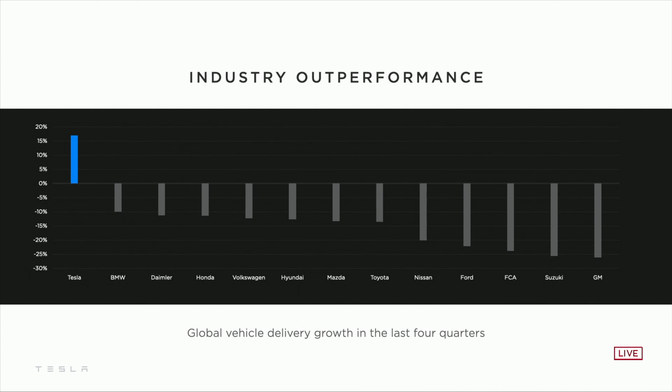Elon also mentioned how critical safety is to their design. They make the safest cars ever tested. And interestingly, the Y was not in some of their documentation. It might just be that the data's not out yet. I'll be curious to find out. But they mentioned the X and the 3, which we know are safest in segment. And I'm sure the Y is right there as well.

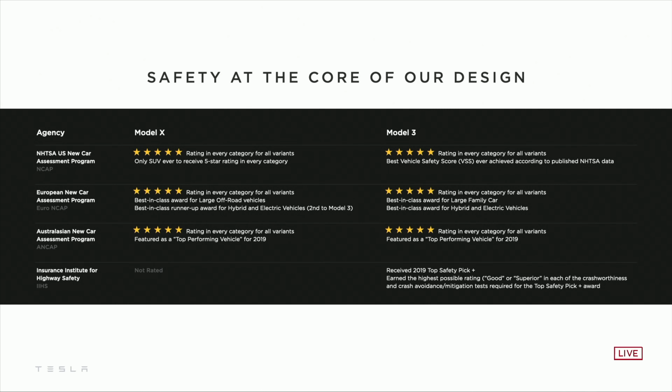One thing I thought was very insightful, and I'll do an entire episode about this. As a software engineer, I think I have a pretty good idea on what they're struggling with, but their entire FSD software package has gone through kind of a page one rewrite. So I think their platform was hitting limitations, and rather than try to patch it with fixes and small changes, I think they wanted to refactor it, re-architect it, and build it again from the ground up.

There's also news about Giga Texas and how they're going to be building Model Ys, which look the same, but they're going to be built differently. All right, so now let's jump right into the heart of the matter, Battery Day.

So first, I loved what Elon mentioned about how they gauge success. He mentions that the idea is, I want to measure how much quicker we have a sustainable transportation model. And that's how he gauges his success. And honestly, already today, I think the number is like 20 years. We'd be 20 years ahead of where we would be without Tesla. And that number is only growing.

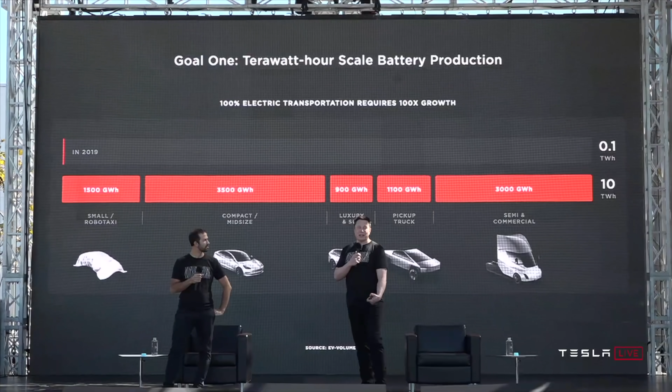Over 1 million EVs delivered and over 26 billion miles driven, all really cool metrics. The next thing is he jumps right into talking about the current battery output. Currently, Tesla is at around 0.1 terawatt hours of battery output a year. And he says we need to be at about 10 terawatt hours per year. So going from where we are now in the gigawatt hours per year capacity to 10 terawatt hours is a really big jump.

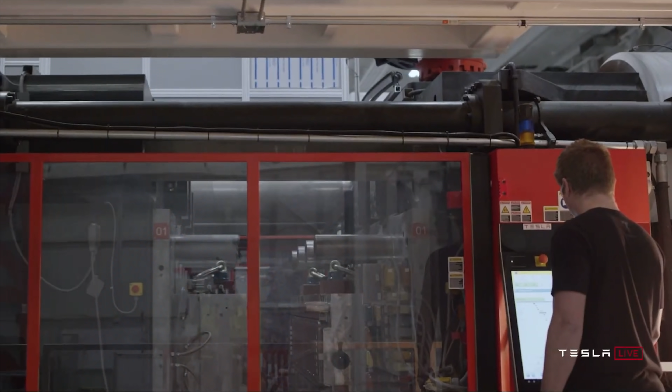And it gets to the heart of one thing I want to make sure that we're all clear on. And that is all the batteries that Tesla is currently buying, whether from Panasonic or LG Chem or CATL, they will continue to do that. Tesla wants to get their hands on every cell possible. If they have more cells, they can make more cars and more Powerwalls and make more money. So they need every cell they can possibly get.

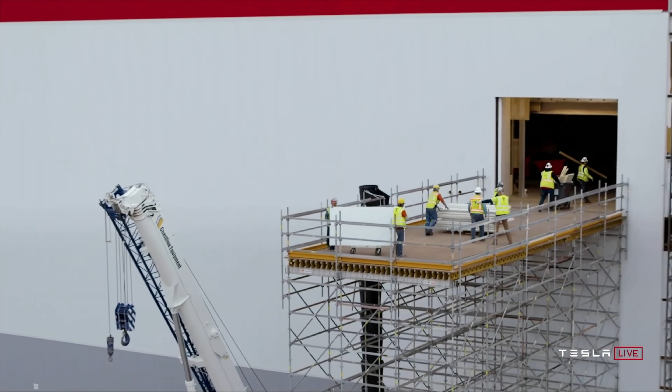And as they project out into 2022, Elon mentioned in a tweet that they're projecting that there will be shortfalls where they're not going to have enough batteries for the kind of scale that they want to build up to. And that is why Tesla building their own batteries in-house is a big deal. To further drive this point home, he mentions that we would need 135 gigafactories like the ones we have in Nevada to make that many batteries.

That just isn't going to happen, in terms of cost, labor, materials, and all the other things that would be needed. That's just not doable. So their goal really is to be more efficient, make more batteries in their factories, make them more energy dense, and all around improve output.

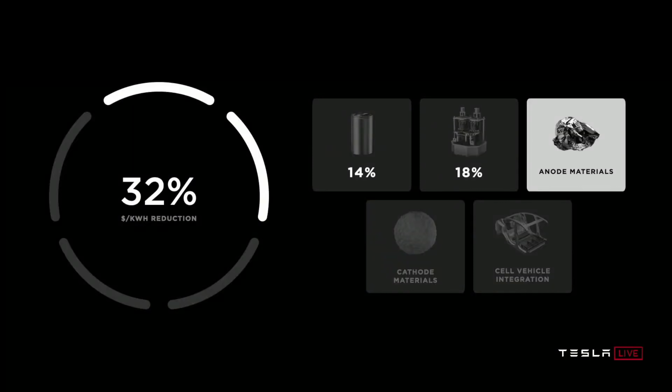So to make a better battery, Tesla has broken it down into improvements in 5 key areas. The first is the battery cell design, the individual cell design. The second is the cell factory, how they're going to build individual cells. The third is the anode materials. Fourth, cathode materials. And fifth, the cell vehicle integration, how it all comes together into the package of a car.

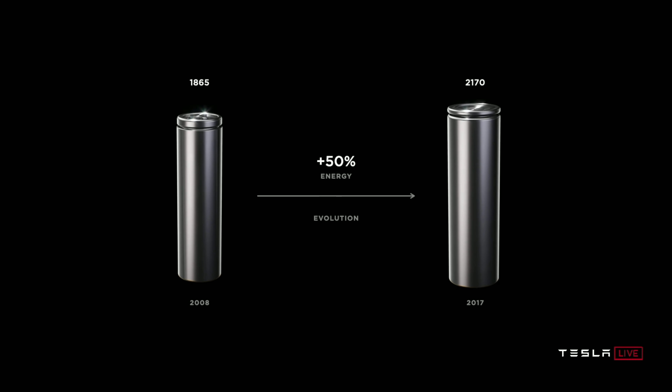Tesla's first batteries in their Model S were 18650, 18 millimeters around and 65 millimeters tall. That moves over to 2170 when they went to the Model 3 and Y. Now, their next cell is going to be even bigger, and it is a 4680. So that means 46 millimeters across and 80 millimeters tall. This is by far a larger battery than they've ever built before.

There's a lot of good things that happen when the batteries get bigger. You can pull more, so the power density, how much energy you can draw from it at a time, goes up. Tesla mentions that the real challenge to bigger batteries is that the heat goes up, and you can't have the batteries getting hotter. So how do they solve that? By going with a tabless battery design.

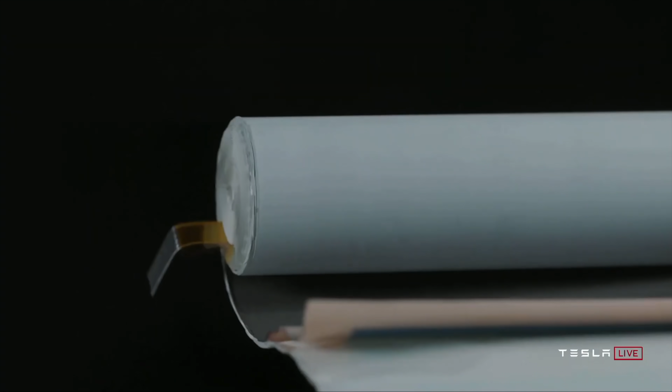Until now, the batteries that they've been putting into their cars have a tab on it. What that means is if you were to unwind the battery roll, the furthest point the electrons would have to travel could potentially be the length of the roll. And now these battery rolls, when you unwind them, could be like 3 meters long, or 9 feet.

So let's say the tab is in the middle. Well, then at the furthest point, you'd have electrons traveling half the length of the roll. And if the tab is on the end, you'd have electrons that have to travel the entire length of the roll. This causes higher resistance and impedance, and it also makes the batteries hotter as they operate.

The solution to this is to go with a tabless architecture, and they have a spiral tab design. So each roll has a little bit of a tab that overlaps and touches itself. As a result, you don't have to have a tab at some point in the battery length. All you'd have to travel is the 80 millimeters that the battery is tall. This is really important, and this is what's going to allow them to use this bigger battery and mitigate the one problem that the bigger battery comes with.

From the cell design, step one of their improvement process, they're going to have 16% better range. I think for volume or weight considered equal. So for example, for 1 kilogram of the old cells versus new, you're going to have 16% more range. Second, you're going to have a 6x increase in power. This power is really important for high power applications like the Tesla Semi.

My car is measured in watt hours per mile. So 250 watt hours per mile means 4 miles per kilowatt hour. The Tesla Semi will be the other way around, measured in kilowatt hours per mile. It'll probably be multiple kilowatt hours per mile. So with this new cell design, they're going to have 6 times the power density from each individual cell, which will be great.

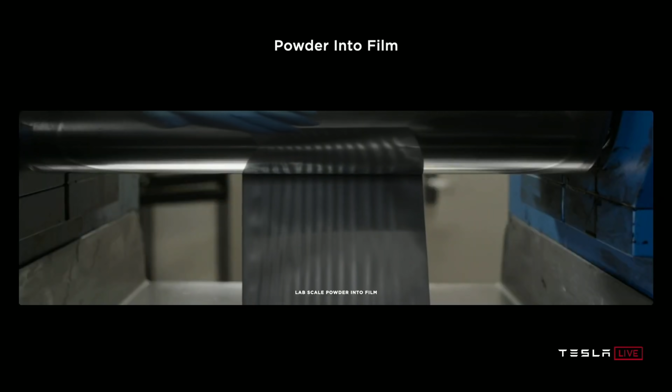All right, so now step 2 is the battery factory category. There's a couple of things here, and they want to talk about the electrode. This is where the Maxwell technology acquisition really comes into play. I knew this would be a big improvement in terms of floor space, methodology, and procedure, and that it would help them make more batteries, but I cannot believe just how much of a reduction this is going to result in.

Current batteries are created when a wet slurry mixture is added to an electrode, and it is then forced into a baking process, then treated and fixed and finally ready to go. This new procedure would be a dry coating, shown as a kind of press. You put the dry coating material on top, roll it through a press, and as a result, now you have the dry electrodes completely ready and attached to the current collectors without any baking or anything else.

The end result is a 10x reduction in the energy required—all that baking, all the ovens, all that sort of thing—and a 10x reduction in floor space footprint. That means in a factory, you only need 1/10 the space you used to need for all these machines, and as a result, you could have more assembly lines for battery production.

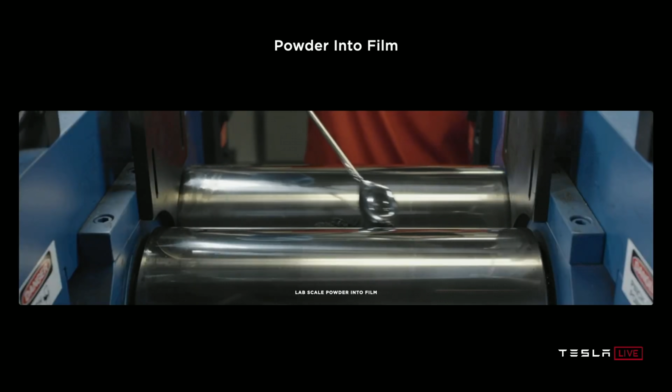One thing Elon wanted to make really clear is that this procedure is really difficult. It wasn't like they acquired Maxwell Technologies and it was mission accomplished. They mentioned they're on their 4th revision of the machine to actually do this dry coating application, and he believes it might be revision 5 or even 6 by the time this reaches full production. So this is really hard—if it was easy, he says everybody would do it. But the end result is shocking, and it'll completely revolutionize how they assemble and put together batteries.

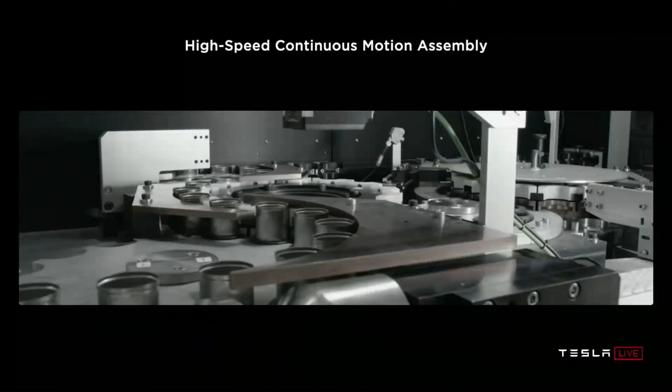They also acquired Hibar Systems, which will be the battery manufacturing machinery they're going to employ. They've already started to improve upon their process and come up with a continuous assembly line to maximize output. In the entire presentation, my biggest takeaway is that the one thing Elon wants to absolutely dominate on is being the best manufacturing company in the world.

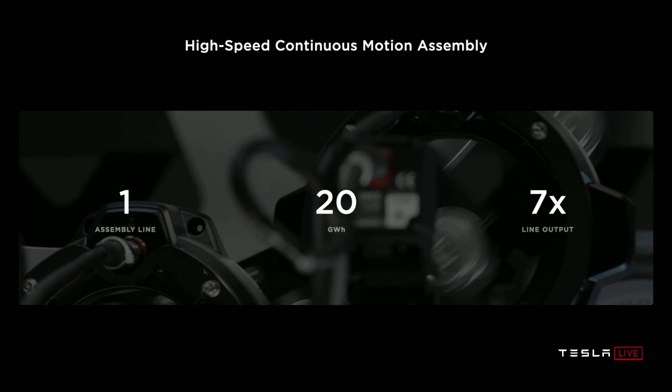He mentions that in a couple of years, everybody will have a long-range EV—that isn't the hard part. He says he wants to be the best manufacturing company in the world. I think what that really means is that long-term, even if other people start to license batteries from other companies, Teslas will always have the advantage because they are deeply invested in the vertical integration of building their own battery. As their manufacturing prowess and expertise increases, they'll widen the gap because they'll have battery costs substantially lower than other people. Until a day when they have so many batteries that they're selling it to other customers, they'll have the biggest advantage in the market.

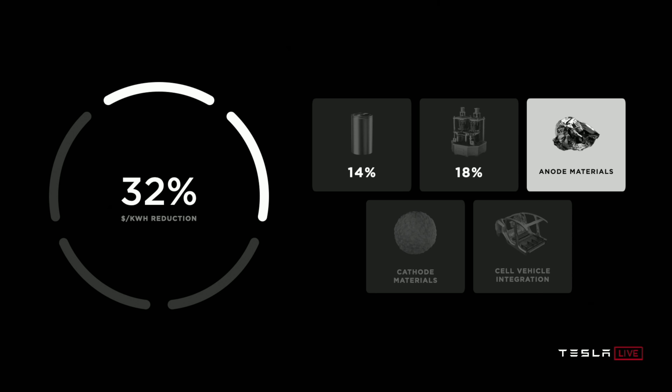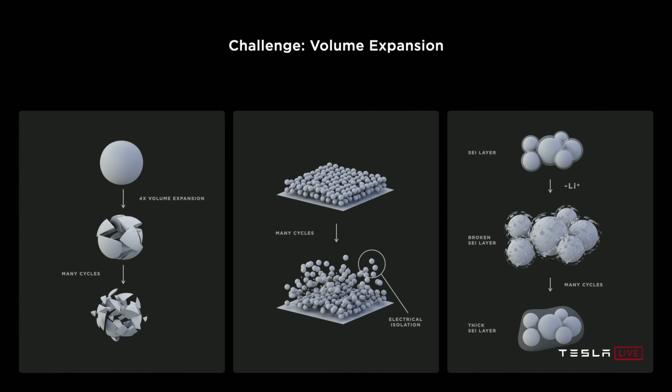The next two categories are anode and cathode material—the main components of a battery. The big takeaway here is that rather than just buying this raw material from some other company, they have plans to build a factory in North America where they will actually be in the business of producing anode and cathode material, not just buying it from somebody else.

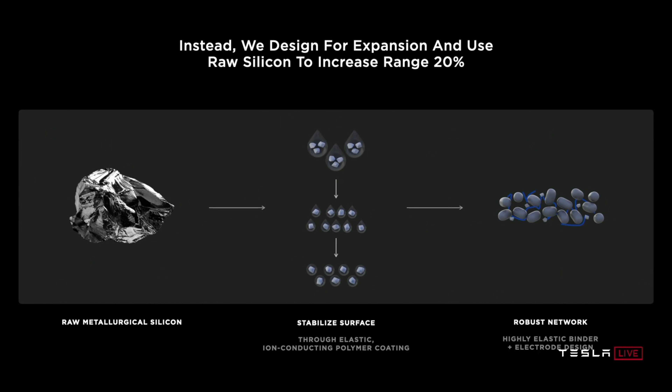For the anode, clearly the move is to have more silicon, but how to do that is key, because solutions like silicon glass or silicon structured in graphite and silicon nanotubes—which is something people thought they might go with—are all really expensive, and the volume they could yield would be too low for the scale they're trying to build batteries at. So they're going to come up with a custom Tesla silicon, which is going to be very cost effective at around $1.20 or so per kilowatt hour. As a result, they're claiming about a 20% better range than with their current chemistry for the anode, all while keeping costs really reasonable.

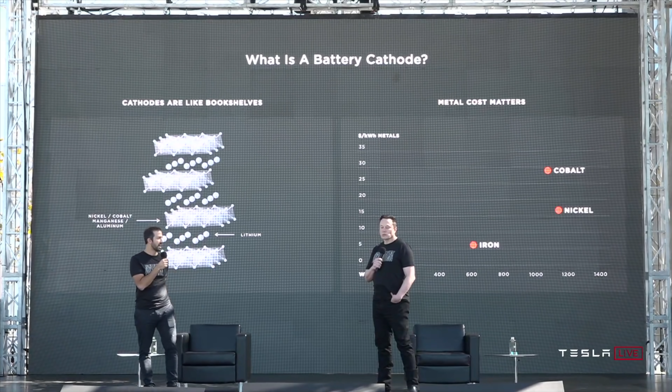Part two, of course, is the cathode. The first key is they wanted to be cobalt free. The reason why is cobalt is the least ethically sourced of their battery materials—there are concerns with child labor and other concerns that Tesla does not want to be associated with. Plus, it's really expensive. So their new battery is going to be cobalt free.

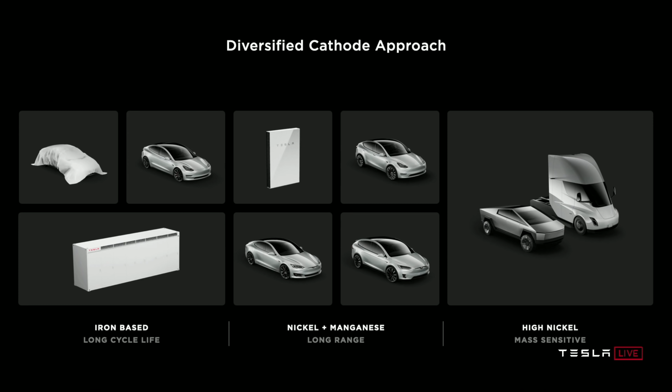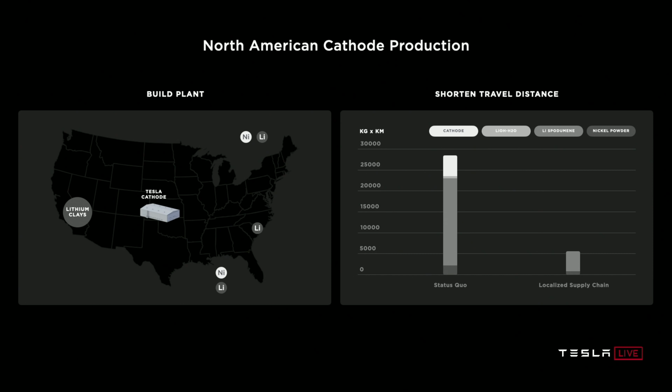The big surprise here for me was the fact that they mentioned they're building a lithium and cathode factory or plant here in North America. That means they'll take raw materials and build them out into the cathode and lithium materials that go into batteries. This is really important because it means they are now in the business of recycling—because when you handle the entire material supply chain from that level, when old packs come in to be recycled, that's actually a cost-saving measure.

Because when you have to go mine it, it costs this much. And when you can just grab it from your own battery packs you used to make and break those down into the lithium and the nickel content to recycle, your costs are actually getting better. So recycling isn't even being done for the environment, which it will be. It's being done because it means it'll have the cheapest supply chain possible.

And he mentioned that when we reach full scale, meaning when everyone's driving electric, we have batteries everywhere, the supply chain will barely even involve mining. It'll all just be recycling. And that's amazing because it drives a nail in the idea that batteries are bad for the environment because sure, we do have to mine them. Once we have them, they can be reformulated and recycled and reused, which is not true about petroleum, for example.

Another comment that I've gotten in the past is about lithium mines. There was an idiot on Twitter that I retweeted who said, this is a lithium mine, and showed a huge hole in the ground. And it's like, no, that's a copper mine, because you don't mine lithium like that. Lithium is actually found in saltwater brine pools around the world.

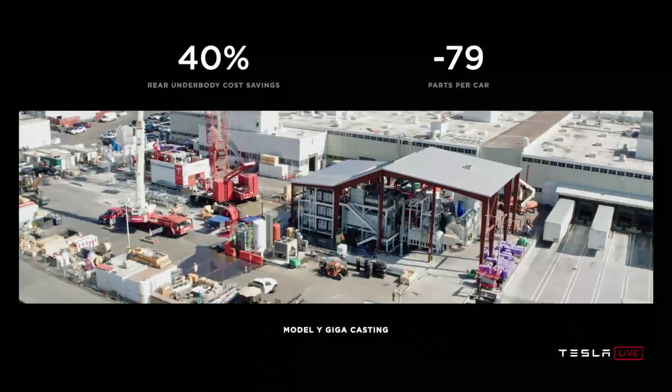All that metal for the pack is metal and weight that isn't giving you any range. So Tesla wants to get rid of that and to reduce all the bits that don't add range and streamline the entire process. How they will do that is with the Gigapress, which is the largest casting machine ever on Earth. And what it will do is it'll build the entire front and back of these vehicles as one huge cast.

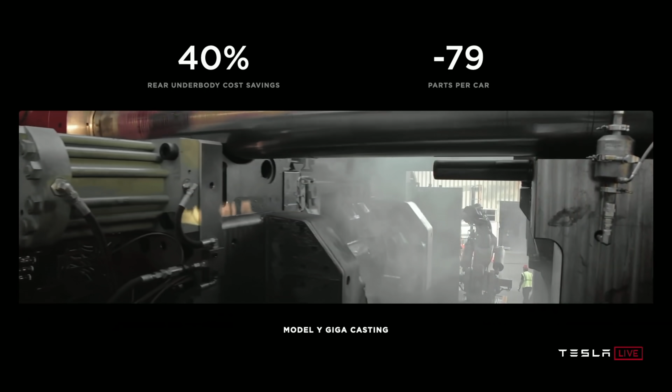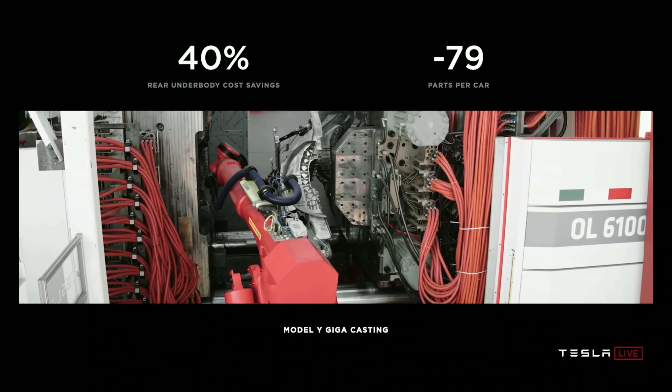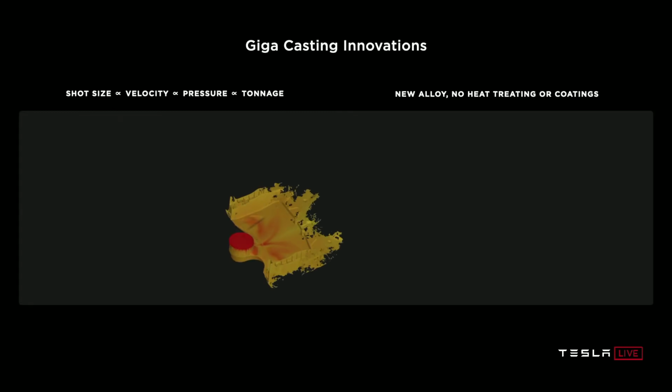Currently, there's a lot of different parts that are stamped into the right shape, and they're either riveted or welded, and there's just a lot of parts and a lot of complication. This machine would actually build the entire back end, for example, of these cars in one piece. And they were able to do that because they actually came up with their own alloy of aluminum. The key here is that it doesn't need to be heat treated to be strong. And that is key if they're going to cast the entire part in one go.

So now with the one piece casting, the batteries would have a place to be fit in. And he mentioned that the structure that will be used to glue and laminate the batteries to the top and the bottom will all act as structure. So now the batteries and the casing are all part of the structure of the car, as opposed to building a structure with an open area for modules to sit in.

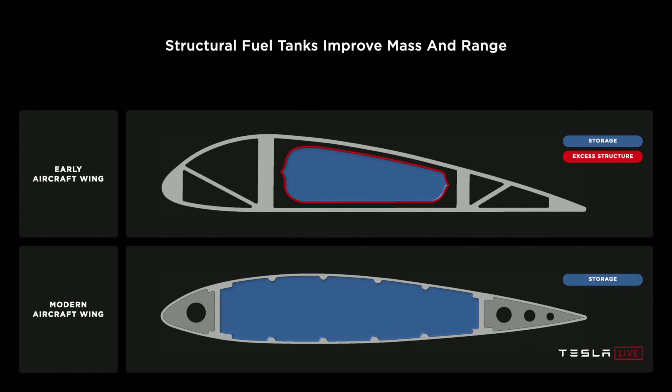And his analogy was to airplanes. Early aircraft had wings that had space for a fuel tank. Later airplanes actually decided, what if we build a wing-shaped fuel tank? And that's kind of what they do. The entire wing is a fuel tank, and it's kind of built into the right shape. That's the approach they're taking with their battery integration into the vehicle itself.

So if you factor in 1, 2, 3, 4, 5 all together, the end result is a 57% savings. But that's not all. They're claiming 54% more range. I'm not sure if that is for the same amount of mass or volume, but either way, it's pretty impressive. And a 56% reduction in the price per kilowatt hour at the battery level.

Also, the investment per gigawatt hour is reduced by 70%. So that means if they want to go and scale up to 10 terawatt hours per year, the price that would need to be spent to reach there has been reduced by 70%. So this is what they're planning to do. And they actually have a battery factory that they're building batteries out of in Fremont. So they have their in-house development. They're going to scale that up.

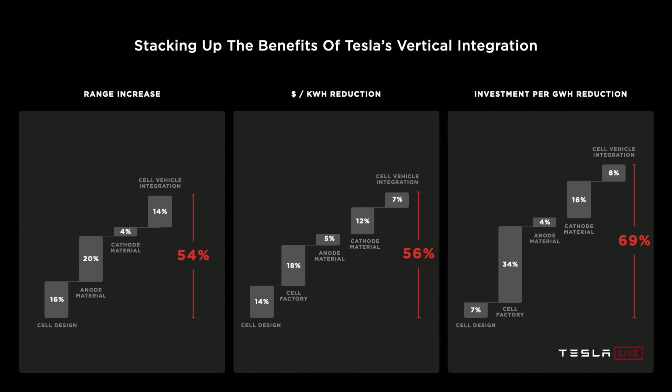And eventually in 18 months or so, they'll start to ship these in products, maybe the Tesla Semi, for example. And in 3-4 years, there'll be a full-scale production. The one thing Elon mentioned that I wasn't too happy with was that they're not going to support vehicle to grid. And his argument was that that's why you should get a Powerwall. And to my ear, that doesn't sound like the best answer.

And the reason is because you have a 100 kilowatt hour battery pack sitting in your garage, and the average car is not used very much. So until we have like robo-taxi networks, most people don't use their cars. And they already have a huge battery pack that could be stabilizing the grid.

But I think this gets into the one thing that was not mentioned. I maybe shouldn't have waited till the very end for this, but they don't mention anything about the life cycle. There was no mention of a 1,000,000-mile battery. So that makes me think all these improvements are going to still be closer to the 250 to 300, 400,000 mile range type numbers, and that they didn't maybe quite reach the 1,000,000-mile battery mark yet.

But until you have really long life cycles, I think the vehicle to grid would be a problem, because if you're going to stand by a 100,000-mile warranty, you don't want these cars' batteries to be depleted and charged sitting there while they're not driving, because then you'll have to replace more packs and it'll cost you more money. So sounds like a business decision, but we will see. I'll report and make another video in the future if things change there.

But the two last things that they mentioned, they're one more things, if you will. First, they confirmed they are building a $25,000 electric vehicle. That will be huge. That is when you compete with the Honda Civic and the Toyota Camry. And that will be the car that they will sell a lot of.